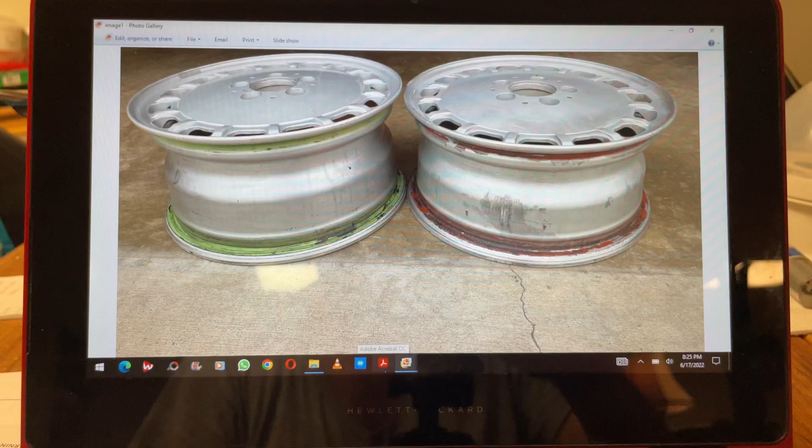Good evening. Tonight we have one of these type of videos, and we want to take a closer look at the rims of the two versions they had for the US and Japanese models, and the differences on the other parts in the steering and suspension, which were also changed.

I will get to this in a minute.

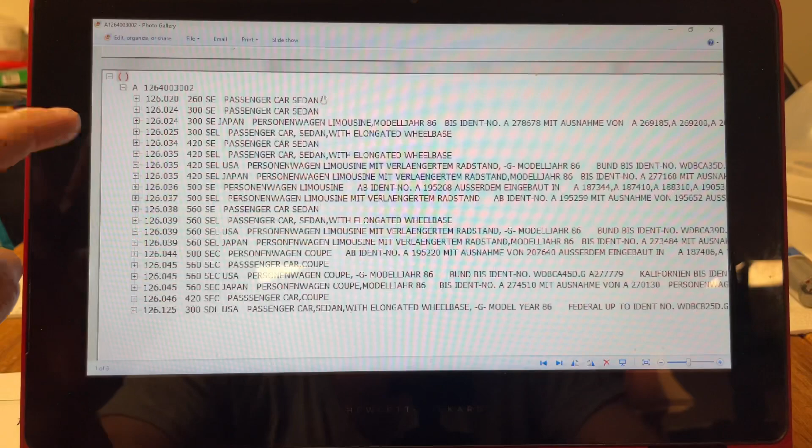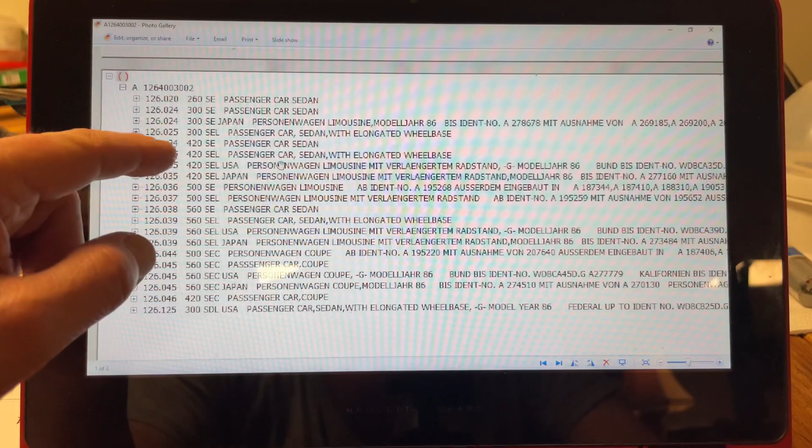We have two part numbers for those. The left one is part number 126 400 30 02. We can see these were used on the 260-300, the Japanese ones, and the 300 SEL - all of them, including the US version 420, and the 300 SDL. They were the same for all countries, all regions.

In order to understand this, I had to take a screenshot of the Mercedes Benz printout from my other computer because I can't print it. It goes by the VIN numbers, and that's the critical part to actually understand which rims you have to use and which not.

I'll get to one more rim where I have a separate part number which correlates to the second part number. And then we had the other one, which is the red rim.

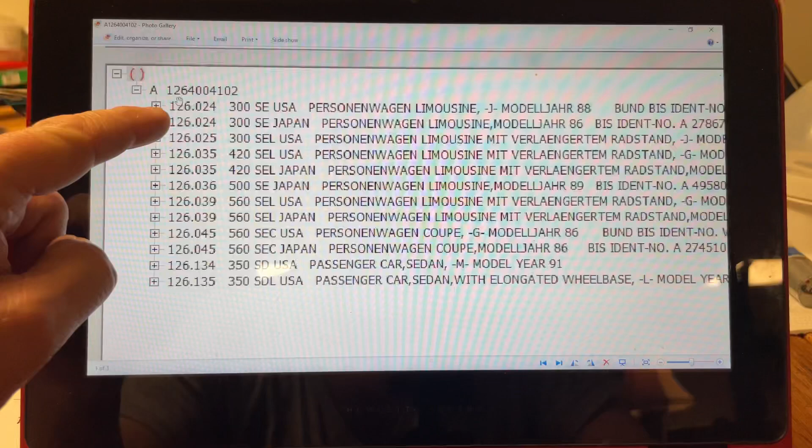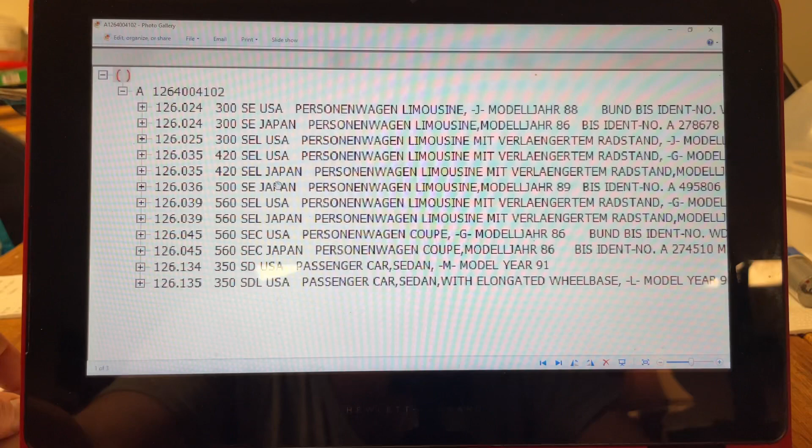This is part number 126 400 41 02, and here you can see these were only used on the USA and Japan versions of the 300, 420, 500 SE - only the 500 SE for Japan - the 560, 560 SEC, and the 350 SDL. There were some exceptions in there from '86; some models used them earlier, and some used them at a later point.

So what you need to do on the US versions, if you import them or if you're here in the United States, is contact your dealer - a Mercedes Benz dealer who can run the VIN number on your car and who has access to the Mercedes Benz parts database, which is this here.

Unfortunately in my database I have no scroll button. All of these part numbers I have in PDF format, so I have to sift through the file folders and find the PDF with this part number.

And then I can actually see all the remaining VIN numbers here. Since it's written in German, you can see there are exceptions. They say model year 89 up to A495806, with the exception of - now they're picking individual vehicles. Each one of them is a VIN number, right here where the little hand is. And these are all exceptions, so all of them had a different one.

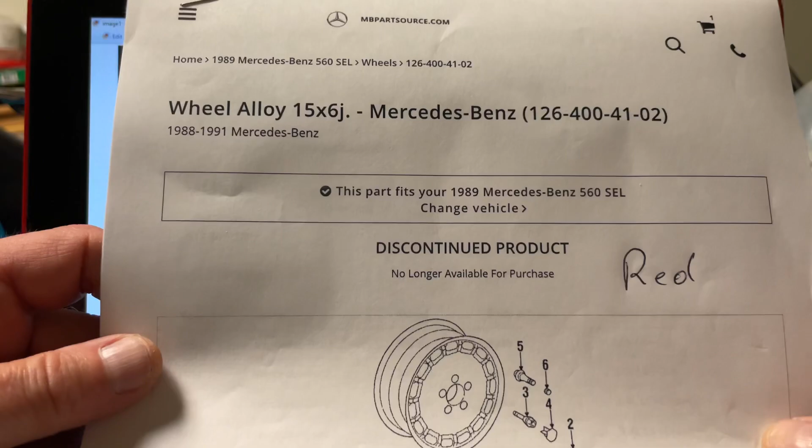You can see this, I have the 4102, which is the red one. This one here, I got the more narrow one, and then it says discontinued product, no longer available for purchase.

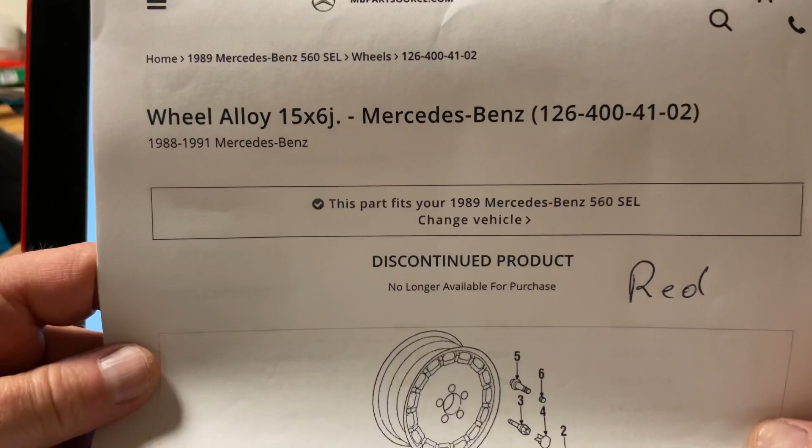So Monday, since it's Friday evening now, I will send an email to Stuttgart, to the home office, and I will ask them if it's not for purchase, if they will send me a set for free, and then see what they're gonna say.

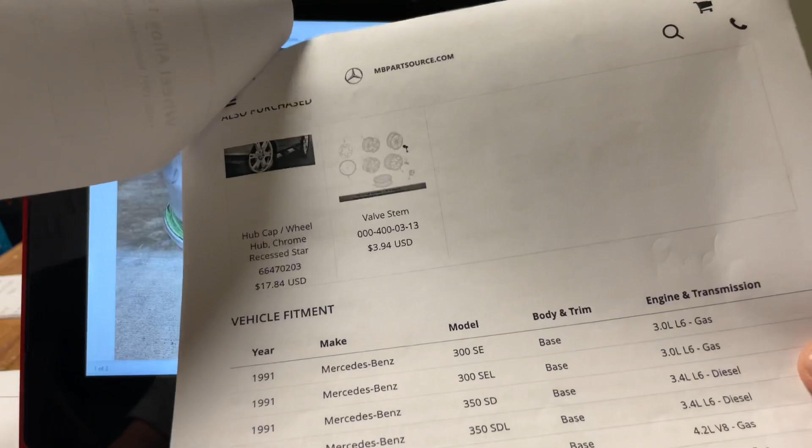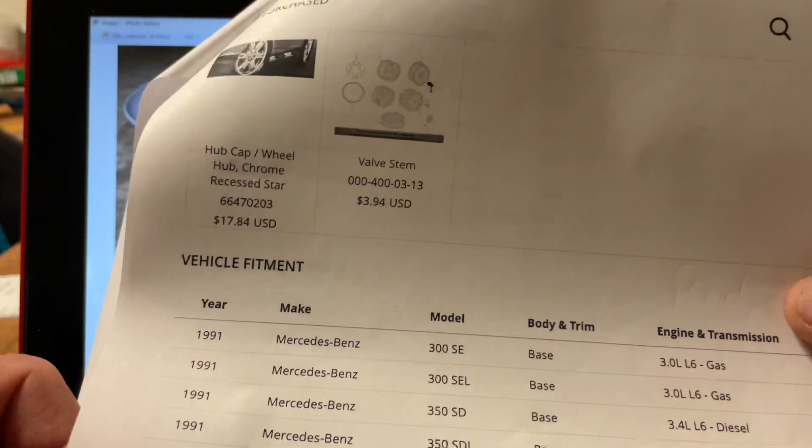No, I'm just kidding. Now, the reason why I printed this out is just to show you this. The MB Part Source has that particular number listed for all these models. You can go to mbpartsource.com, put in your car, your number, what model you got, and then you can see which rim will fit.

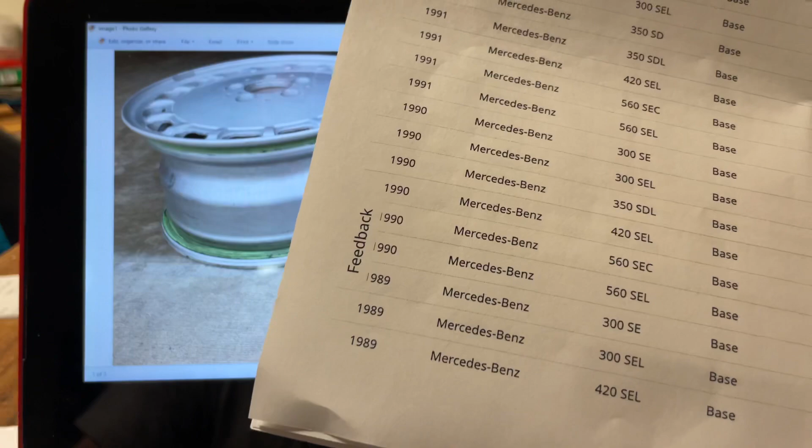If I run the... now of course I have plenty of paper here, and as it always goes, I may have put that paper second. No? Did I staple them all together?

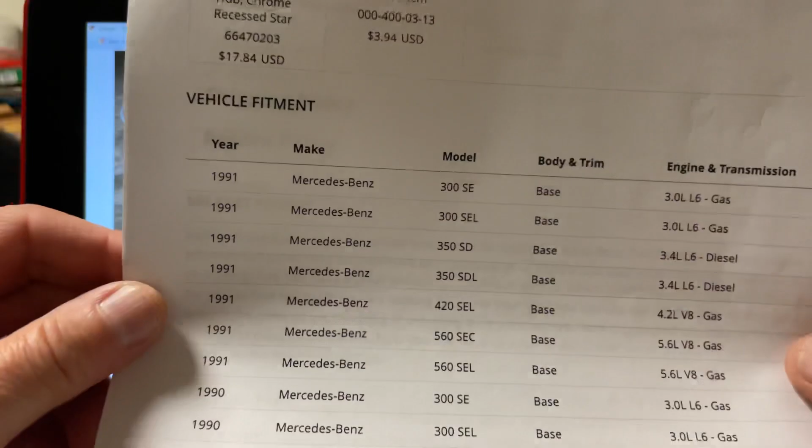Ah, here it is. So these are the ones from 91 on, all the way down to 1988, and that would be September 1st of 1987. So if your car has in the A column the manufacturing month and date of September 1987 or higher, then you will need the red rim, which is the 4102 part number. That's this one here, and that says it fits.

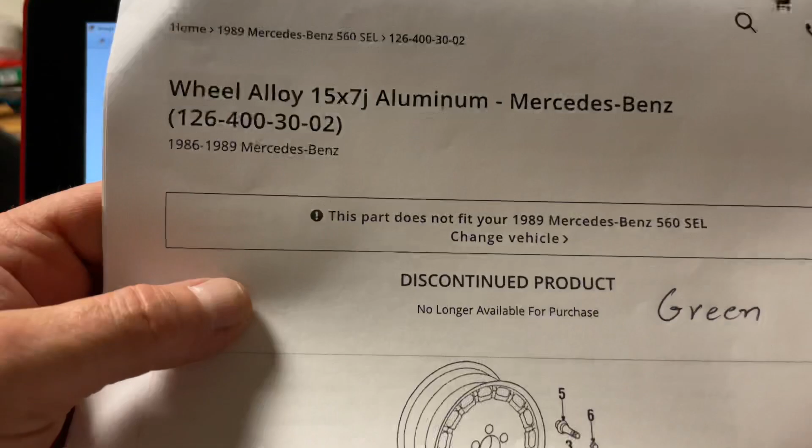If I do it with my car and use the other part number for the green rim, the 3002, it says this part does not fit your 1989 Mercedes-Benz 560 SEL. And you can see this on some of them - they used the wider rims on the 89 and 88 560 SL, the R107.

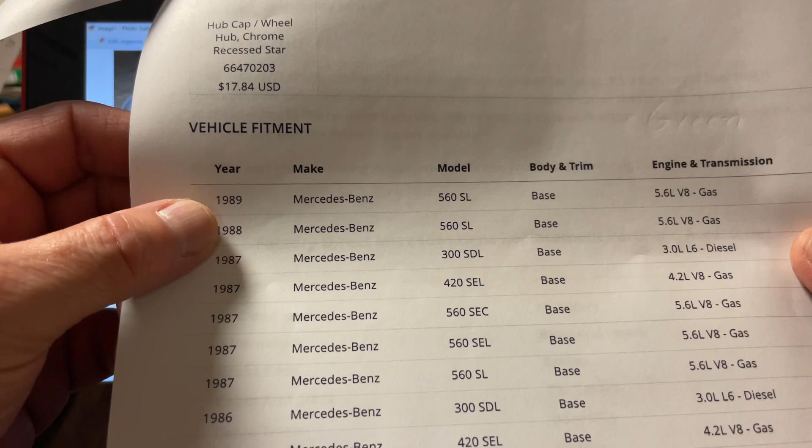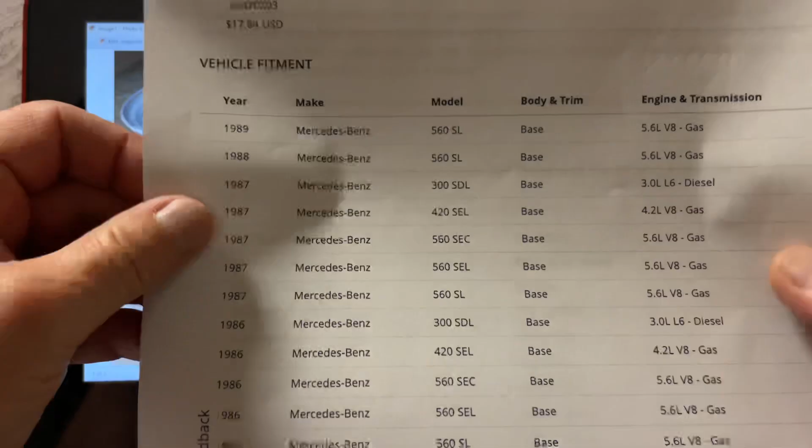And then they had them up to 87 - this is now all August. If your manufacturing date is 8/87, August of 87, you will have the wider rims, and earlier. That will go through these models here I have listed from 86 on.

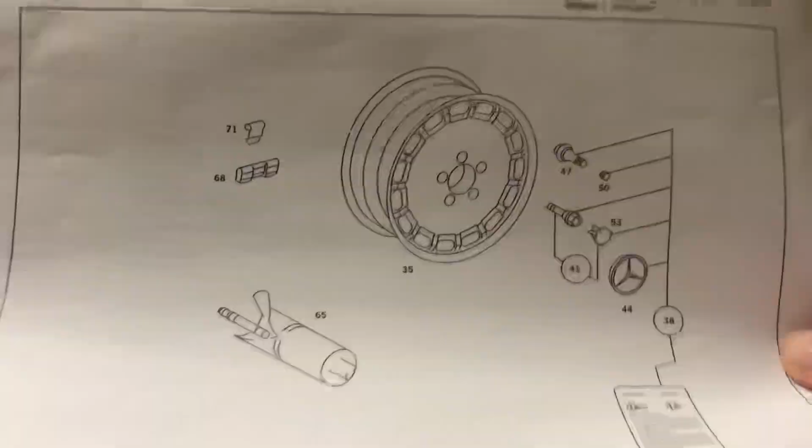So this is just what we got here to get some clarification. Now I double checked this with the actual parts list, which is group 40015 for the W126.039 USA version, and you can see our rim is 35, and I have under 35.

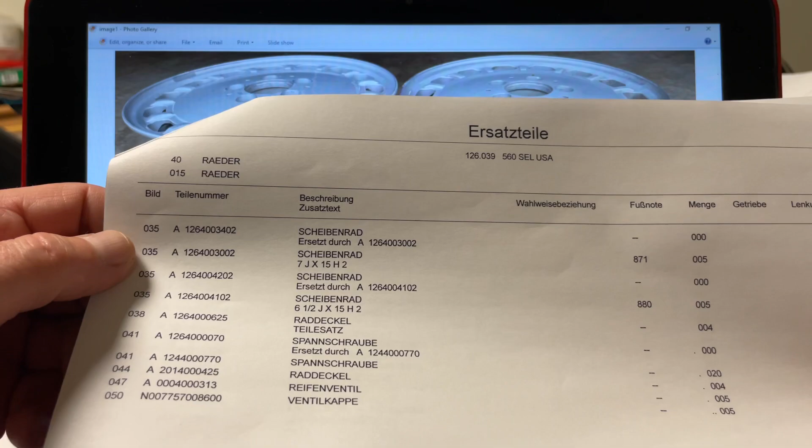This is now the German printout from my parts catalog I have on my computer. And you can see this, that there was an earlier number - they had a 3402, then it went to 3002, and then it went to the 4202. There is no further information on the 3402, I have not been able to find anything here. On the 3002, we have footnote 871, and on the 4202, we have footnote 880.

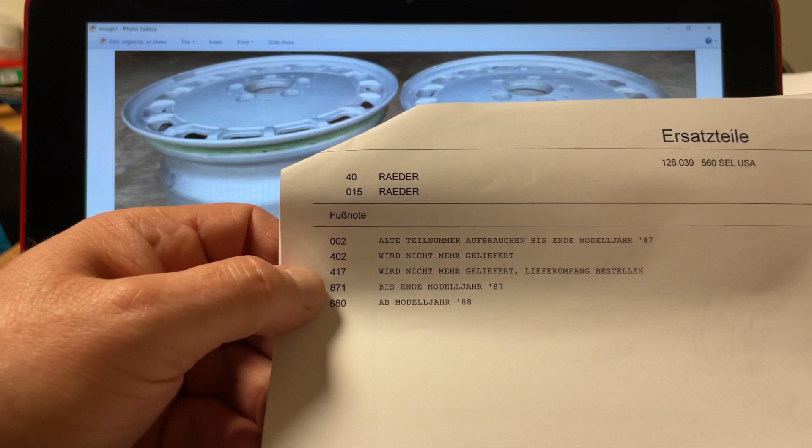And if we go to the very last page, all the way back here, we can now see - sorry that you couldn't see this - but we had 871, where it says 'bis Ende Modelljahr 87', until end of model year 87.

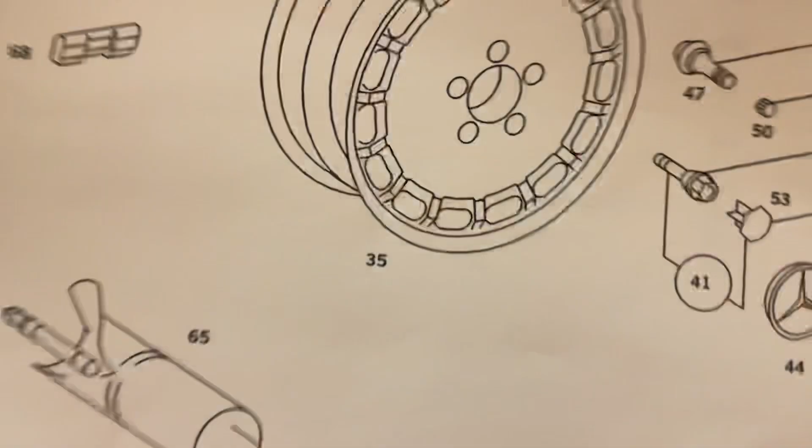That is August 1987, and 880 'ab Modelljahr 88', starting with model year 88, which is September of 1987. So this is in the parts list, and all of this correlates. The reason why you cannot mount the older ones on the newer US or Japan versions is because of the shock on the front.

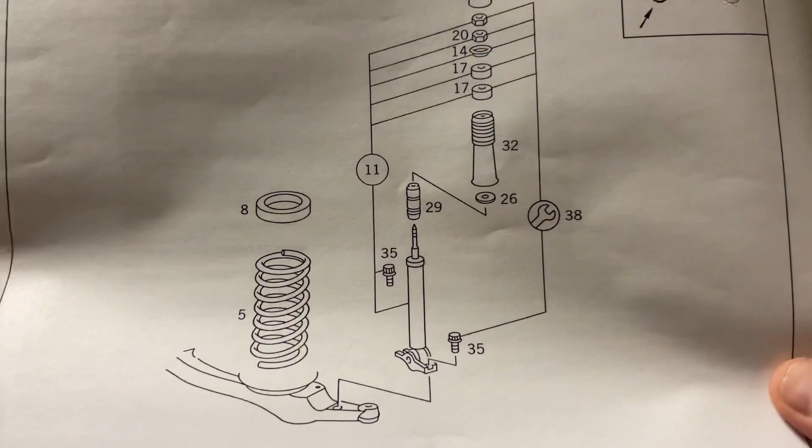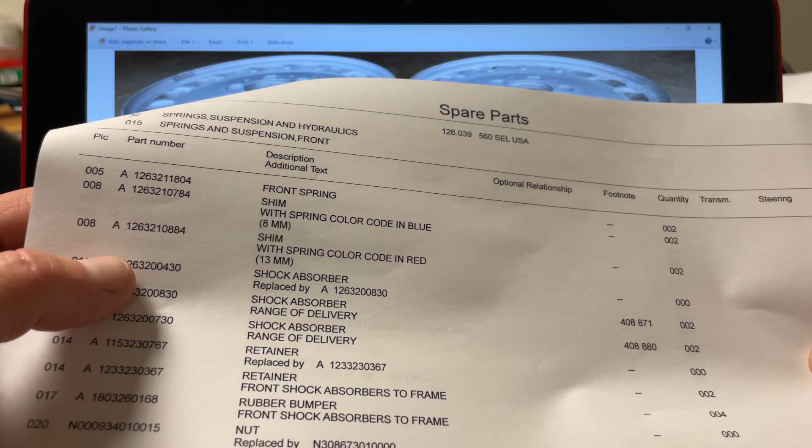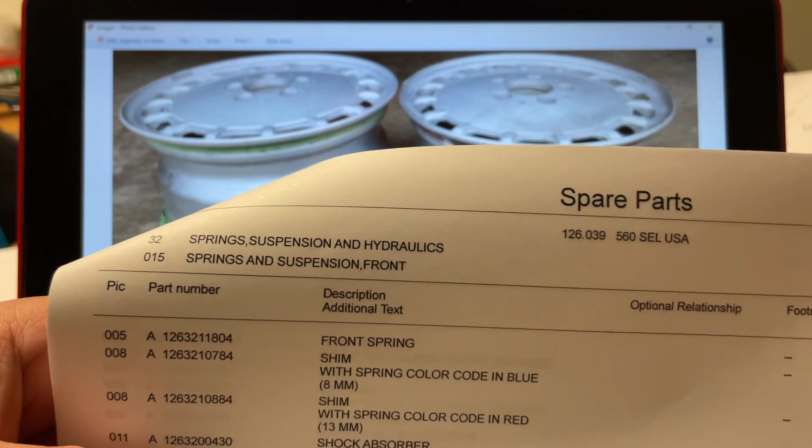And what they did here is the same thing. The shock absorber has 1, 2, 3 part numbers for the 560. This is now again the 126.039 SEL USA, 560 SEL USA. And we have footnote 408 and 871, 408 and 880.

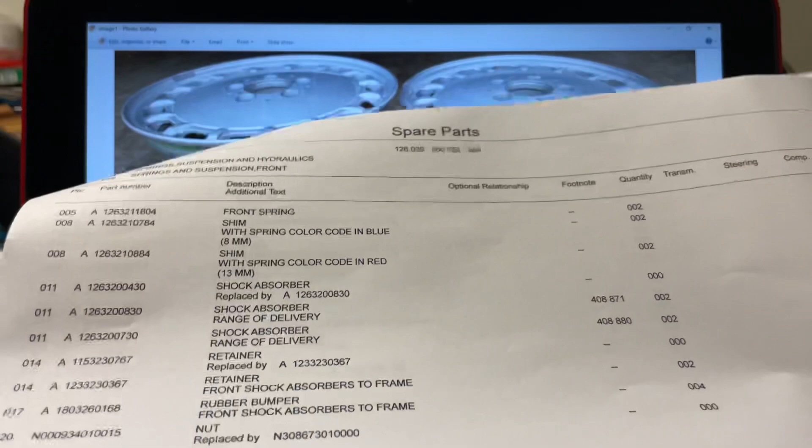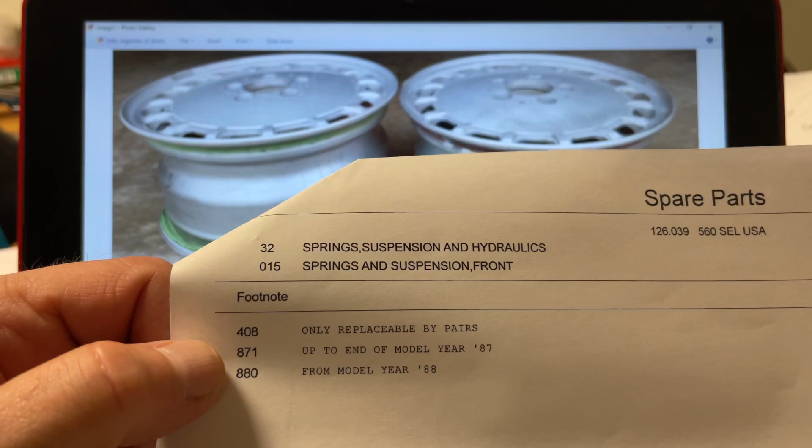And then we go again to the last page. I usually look, when I look at these parts lists, I usually go to the last page first, because these numbers will tell you a lot. We had 408, only replaceable by pair, so you have to do both sides at the same time, do not change them individually. 871 is the same up to the end of model year 87, and 880 from model year 88.

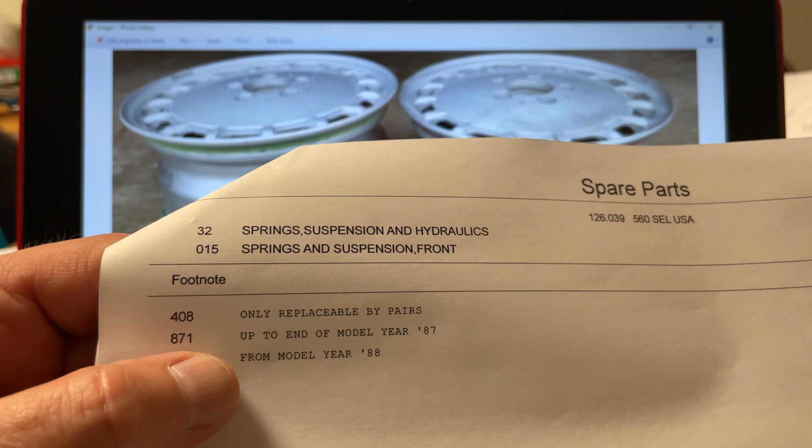So now on top of this, that we have 2 different rims, we also have 2 different shocks for the front. If you get the shocks mixed up with the rims, depending on your vehicle, then you're gonna have some form of vibration issues. And this is for the front, and for the rear it is even more dramatic.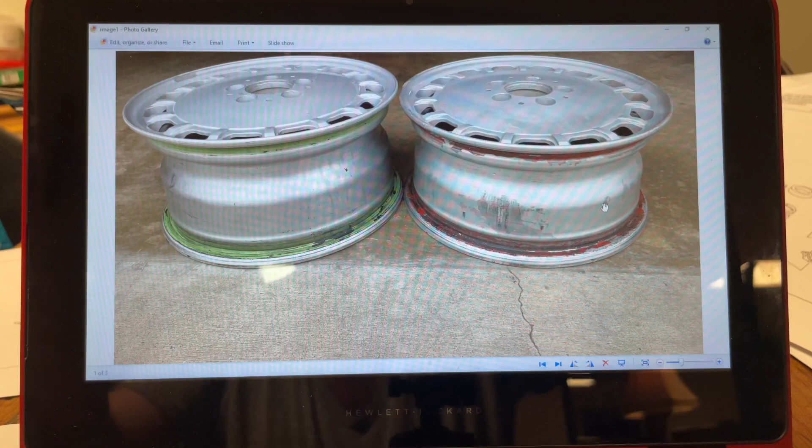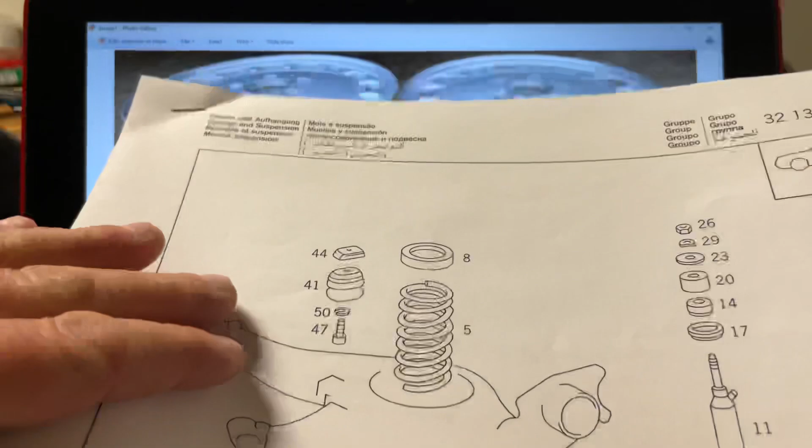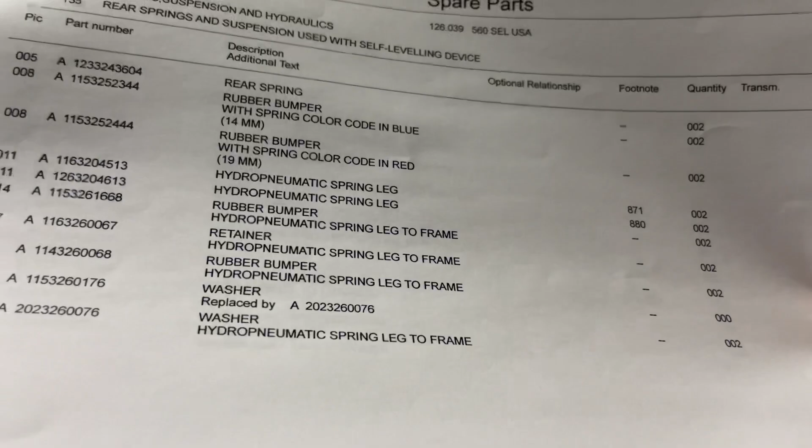This is now again the parts list for the rear shocks on my vehicle, which is the 126.039 560 SEL USA. The shock is 11. This is the one with the connection for the hydraulic system, for the self-leveling suspension. And here we have, was that 11? Yeah, 11 is the shock. And they call that a hydropneumatic spring leg, so that is not even called a shock anymore.

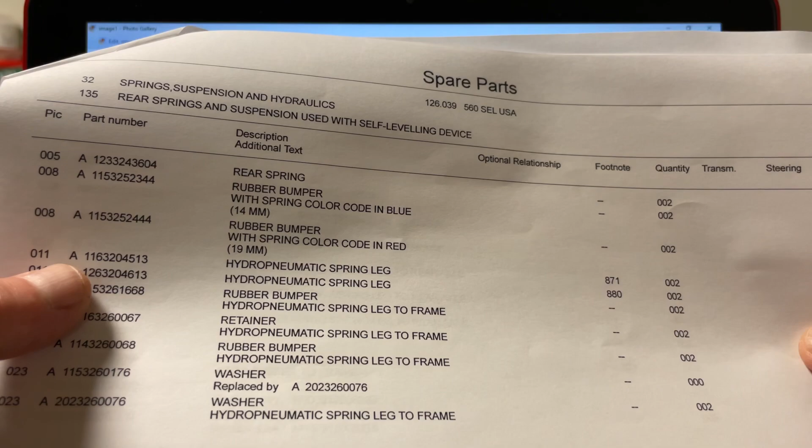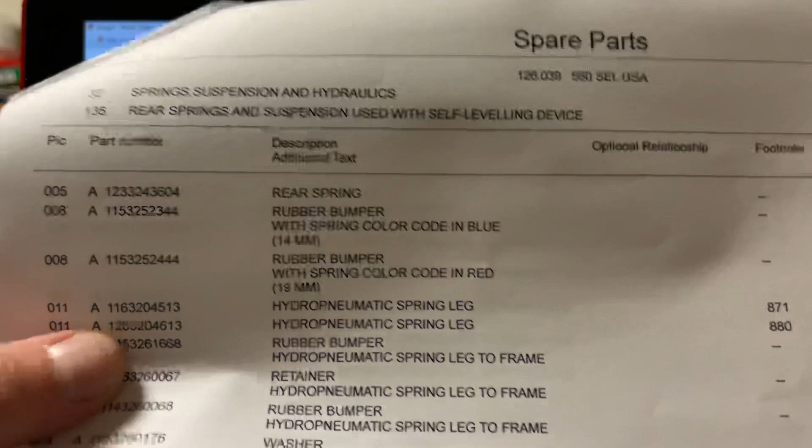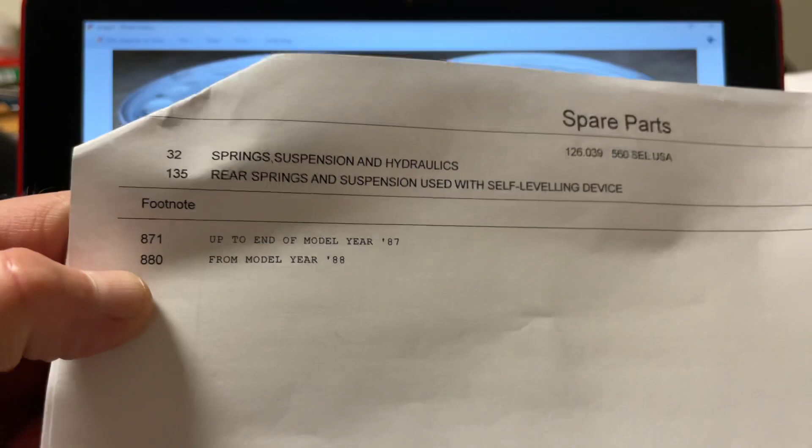Neither one of them are available. You can see this, there's 2 revisions, and here again we have 871 and 880, 2 different part numbers. And we go to the last page. Here we have the same thing, 871 up to the end of model year 87, which is August of 1987, and 880 from model year 88, which is September of 1987.

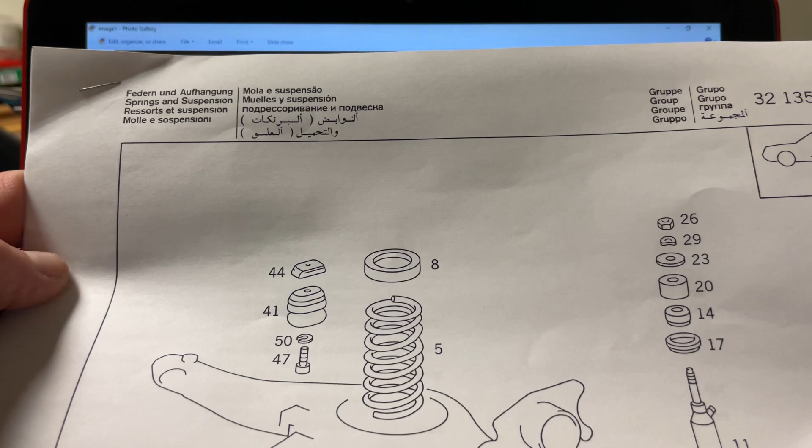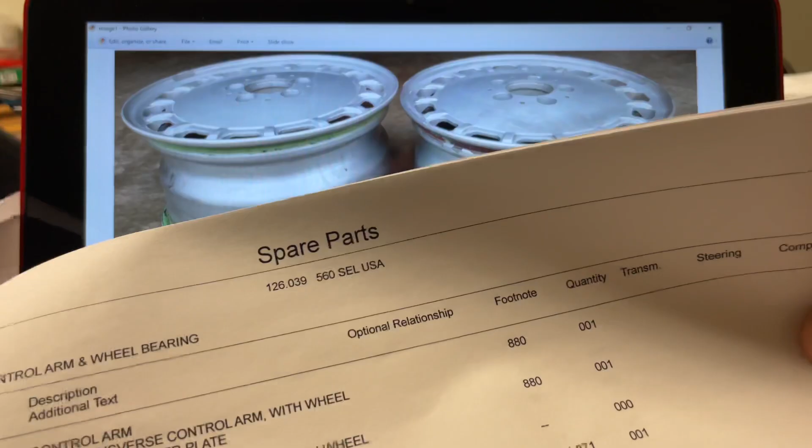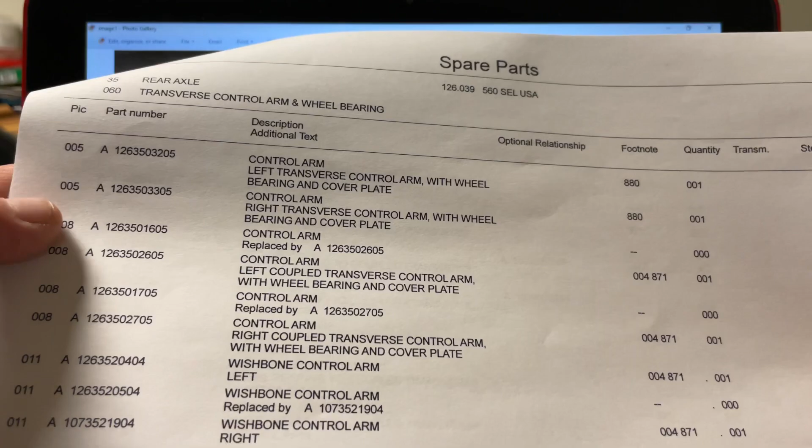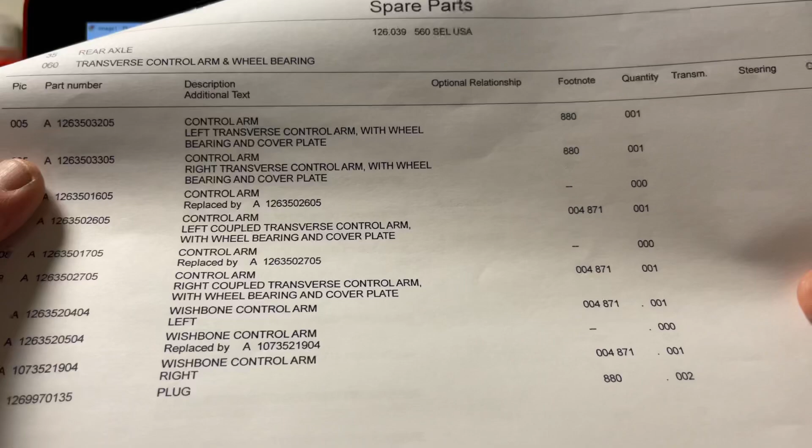And now comes the real big thing. This is the wishbone suspension in the rear, as you have guessed it. And here we got two different drawings for that. And here again we are at the 560 SEL, the 126 039, and we have control arm. And here we have this again, control arm, and you have the same notes, 880, 880, 871, 871, and then footnote 004. So they changed the control arms, the wishbone arms basically.

And we can look this up. There's a whole bunch of parts. You can see how many pages I got. This is all associated with the rear suspension.

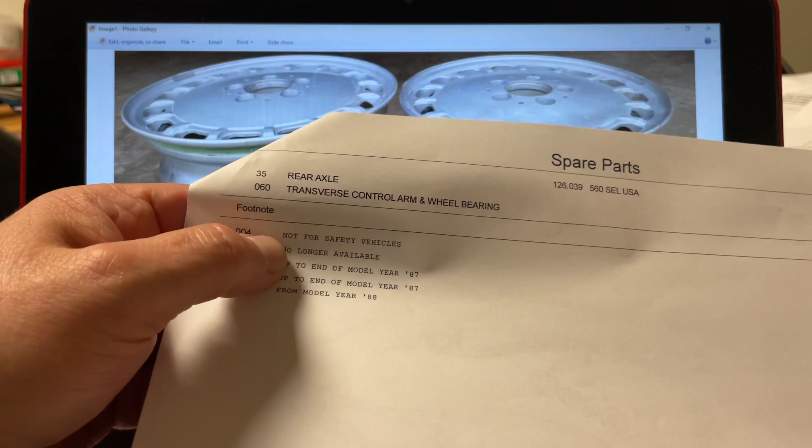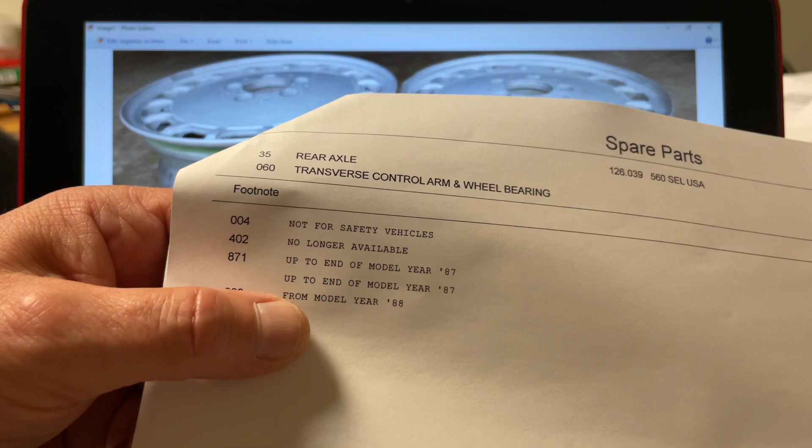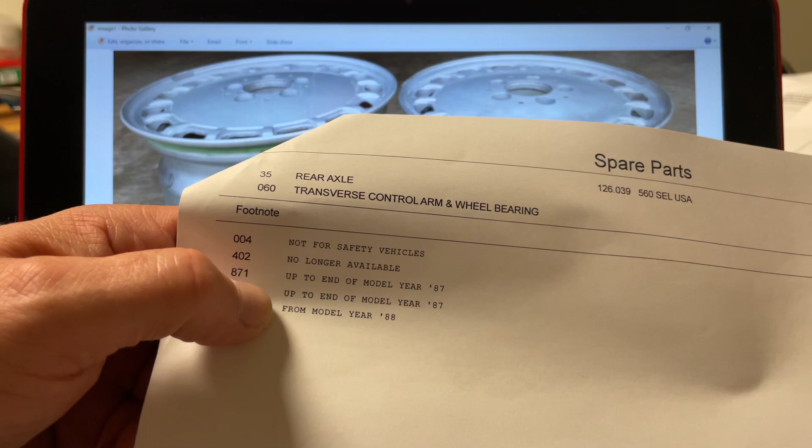And here we got it, 004, not for safety vehicles. I'm not quite sure what that means. And we have 871 up to end of model year 87 and 880 for model year 88. Again, this would be August of 1987, and the beginning is September of 1987. The model year for next year always started at Mercedes Benz on September 1st, 1987.

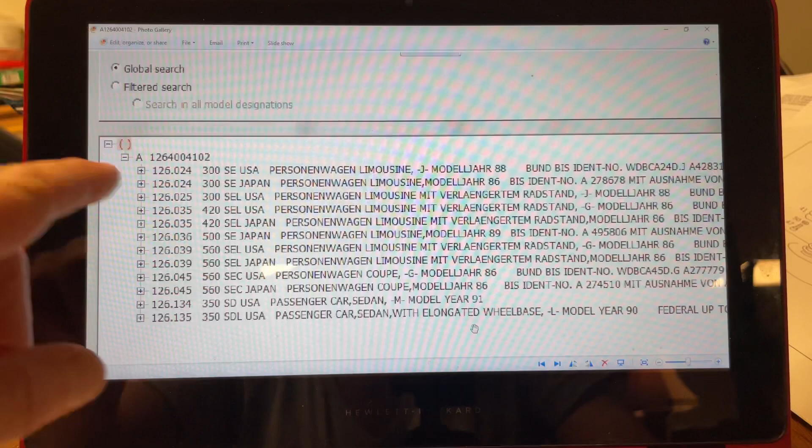And because of all of this, these vehicles here, which have the smaller rims listed, have the statement in here where it says mit Ausnahme von. That means with the exception, this goes until ending number of the VIN 495806.

And then these numbers here, these particular models, these vehicles which had those ended in those VIN numbers here, which are all listed to the right. This is 1, 2, 3, 4, 5, 6, 7, 8, 9, 10, and then, like I said, I couldn't scroll it. I have to print this whole document out in PDF to actually read all the exceptions of the VIN numbers. Do not have the modification. They will have the other version in there, the previous one. So there you have to be very, very careful.

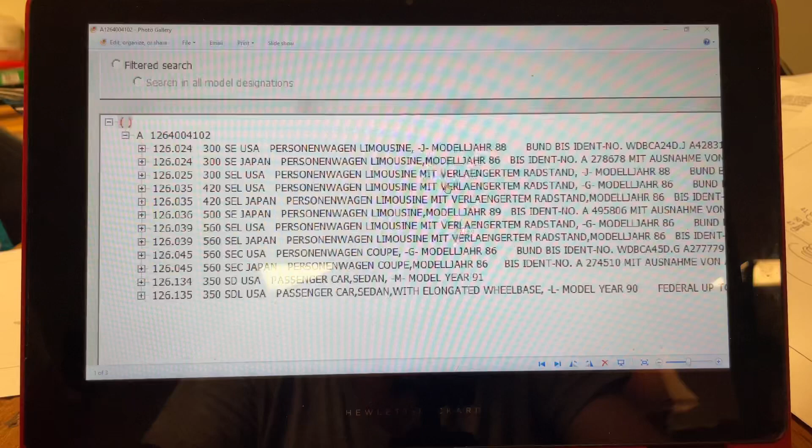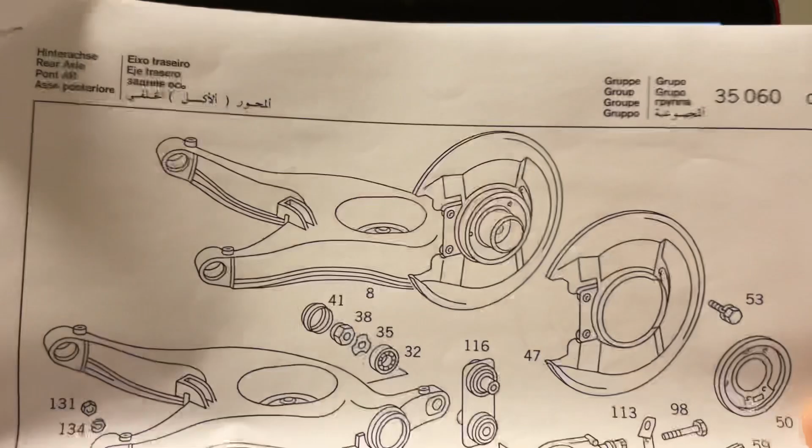And you have to know, first of all, what your car is with the VIN number, whether it is excluded, whether you are falling under this category here for the 4102. Let me see if I can zoom this in here, 4102, or if you have to use the 3002 with the different shocks and the different wishbone arms or control arms.

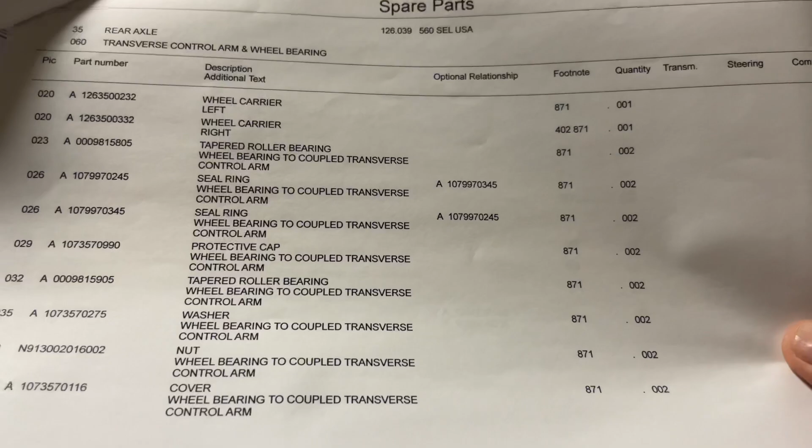You see this, the wheel carriers are different. Basically every one of these here, 871, these are all the part numbers associated. The entire rear suspension changed basically.

And these numbers here will tell you whether your VIN number was included, even though you had a newer, say, an 88 or 89. But if your VIN number is here in the exception, then you didn't have the revised version of the rear suspension shocks, and you would also have then the wider rims.

So this is why you have to contact your dealer or a Mercedes-Benz dealer who has access to this database here, which they should have as a Mercedes-Benz dealer. This is basically when you do a part search for this, which they can do. They can then look this up for the particular model and then see what you got there and whatnot.

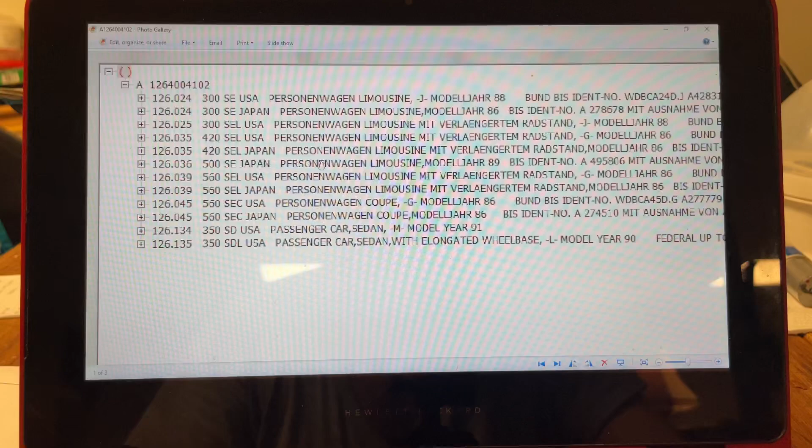And then you can make a decision, and then you can check the rims. This is what our viewer told me, or that's why he sent me the picture: for one, you can see the height difference between the two. The red one is the 6.5 inches width, 7 inches width. They take two different sets of tires.

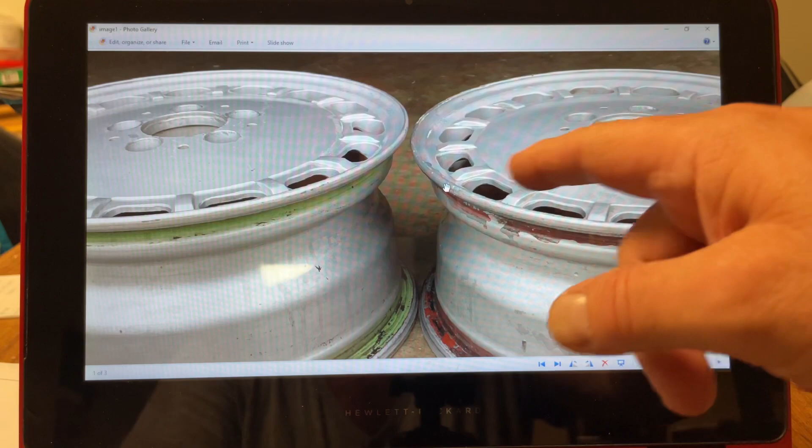My car has those, and my car came with Michelins, and I know that there was a time when they used Pirelli, and I do not know if they mounted the Pirelli tires and what size to this. But this is especially important for those, especially in Germany, who are re-importing the old Mercedes-Benzes from the United States or from Japan, or if you live in any other European country and you're importing a US or Japan version with the rim sizes.

Because if you accidentally have these ones on a US version, but you have not the correct documentation, or you go just to a tire store and they look the German version of your car up, they're going to come up with the 7 inches and that may not fit. That is just one thing.

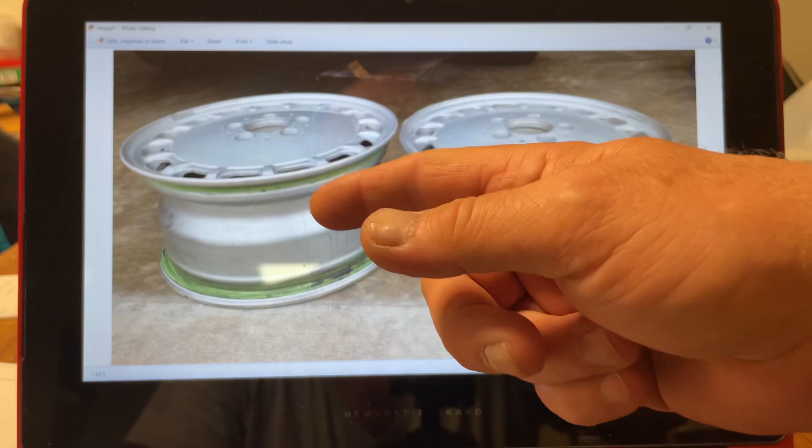And the other thing is, if you have the older version of the vehicle with the other suspension system and shocks, and you mount the more narrow wheels on there by accident, you're going to experience vibration. And the same is true the opposite way. If you put these 7-inch rims on the newer vehicles, which have the modified control arms, the entire rear suspension, and the changed shocks, they will not work with these tires. You're going to have vibration there too.

From what the viewer told me in his email, that was a very nice email, and I would like to thank him for it. And I also would like to thank his dad. They sent me all their nice pictures of their whole fleet of 560 SELs and SECs and W124s and what have you. Nice people, really nice people.

They are experiencing vibration issues at the range of about 80 to 85 miles per hour, and he could not distinguish which rim would go onto what car. But like I said, in order to work on this stuff, you really need to have all of this information here, which is all these part lists for your particular model.

And then you would have to double check that someone did not install by accident the wrong shocks, especially the rear shocks with the hydraulic system in your car, especially on the newer versions. And I'm also not quite sure how well the non-hydraulic self-leveling suspension shocks work on the rear suspension on the newer vehicles.